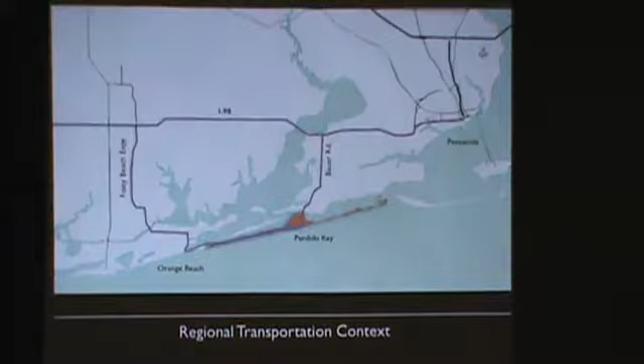Okay, let's talk transportation for a few minutes for a change of pace. We're working closely with the urban design team. These are the folks that get a blank sheet of paper with an engineering scale and measure exactly 60 feet for the commercial depth of a store because they know that works. Some teams just do asterisks and triangles with no scale to what they draw, but these folks know urban design.

So we have a rule of thumb in our planning: LU1 TR2. Figure out the land use pattern and design first, and transportation comes second. Never do your transportation first and then tell the urban designers to see what they can do with that—you've given them one arm behind their back, or even worse.

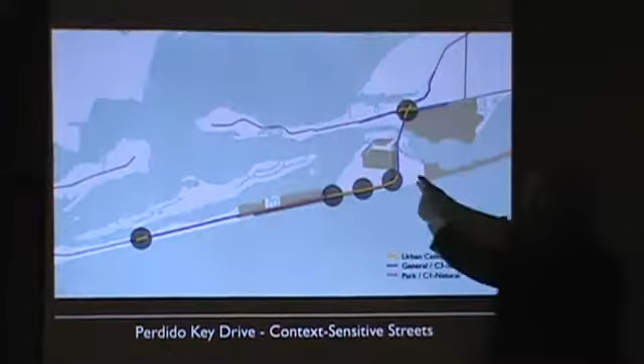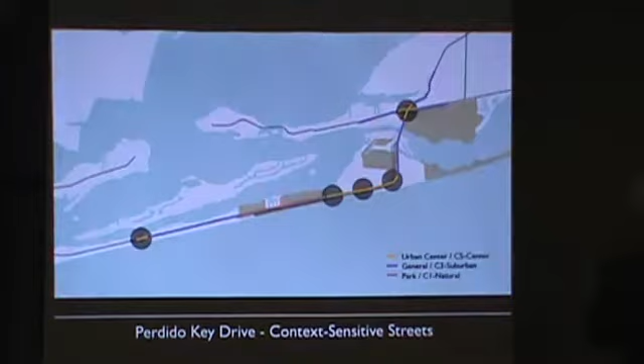So land use pattern and vision for the place first, transportation second. These are a general indication of town centers that can emerge along the area, and we'll have thoroughfares designed differently as they go through different contexts. The thing you want is diversity of cross-section. A lot of DOTs in the country used to be state road departments working out in the countryside, so they liked a cross-section that went for 6 miles without changing, and only changed when they got to a town—but towns were miles apart. We want changes very frequently, every quarter to half a mile, you change the street.

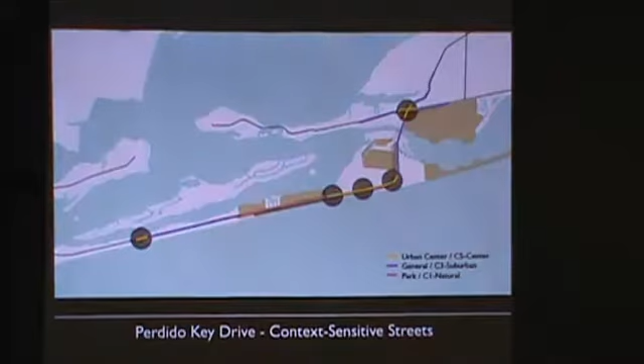Now, one of the first things we wanted to look at is very short term—what could we recommend for this island that's very short term and inexpensive for you to do? You see that little sign up at the top? That's the first thing: 30 miles an hour at the bend where the tall condos are across from the shopping, and it's a fearful walk across that street to get to the other side, unless you're in the prime of your life and confident. If you're very young or very old, that's a difficult crossing. So 30 miles per hour for the posted speed limit from Johnson down to the next place.

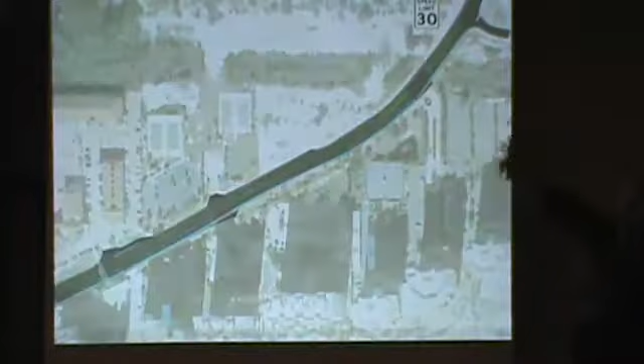Now, back up—this blue line is a sidewalk we're proposing on that one side of the road. And there's a way you can do a curb that separates the traffic from the sidewalk, where the curb goes along, has a little notch, and comes back up.

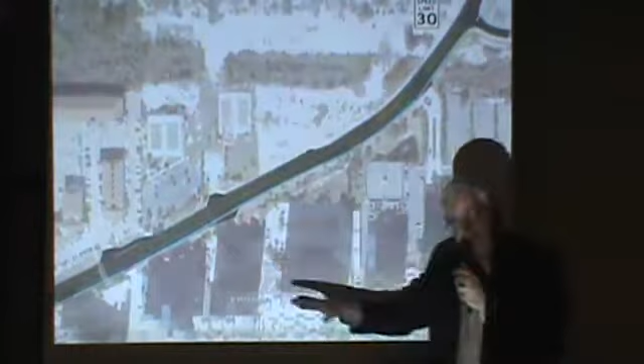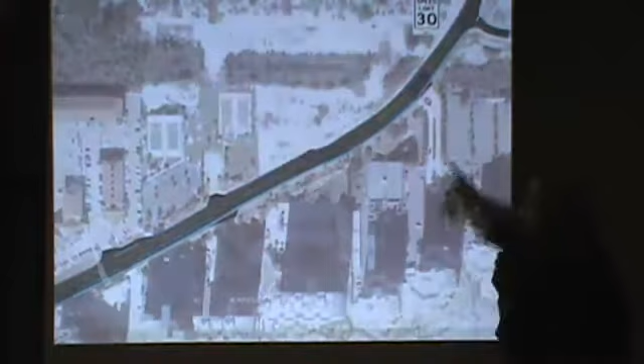The sheet flow of water can go through those notches. But for most of the distance, you have a nice curb that will make pedestrians feel more comfortable. Here's a pedestrian crossing of the driveway, and another pedestrian crossing.

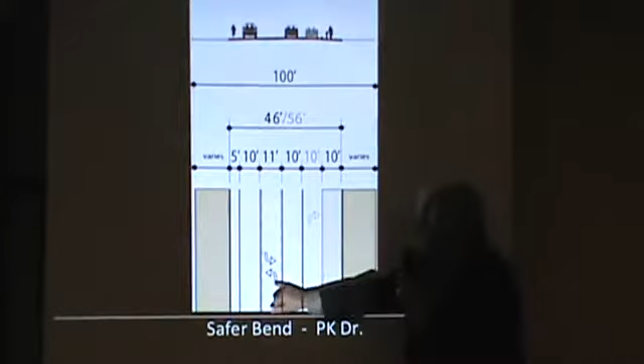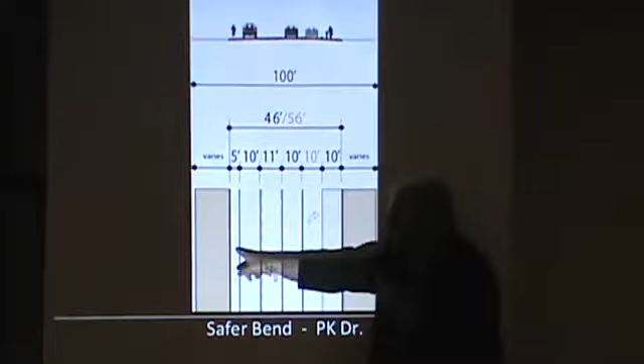Let me show you the next detail. There's a 100-foot right-of-way, so what we're doing is taking the center turn lane and 2 lanes, and putting a pedestrian sidewalk down this side. There's still a bike path on that side, and pedestrians and bicycles can share this. It's not ideal, but it's an interim measure to bring some pedestrian activity to this central area.

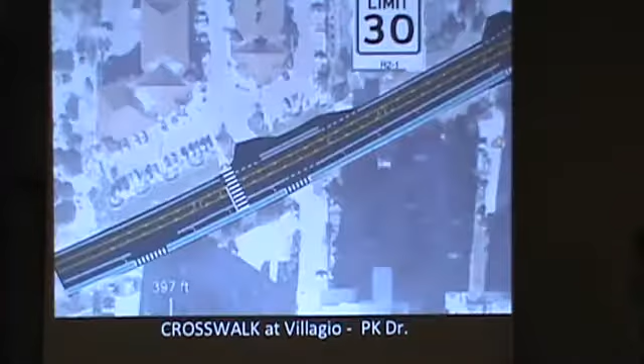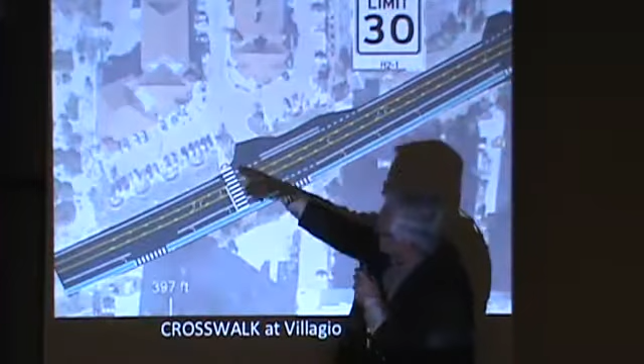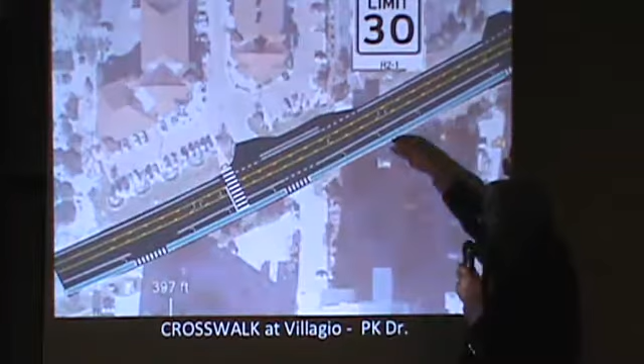Here's a close-up of the Villagio Shopping Center on the other side, 30 miles per hour again. Here's the brand new crosswalk, going from the left side of the entrance driveway, and here's the blue sidewalk all the way on the other side. So you can come from a condo and walk down the sidewalk and have a crossing right there.

You also have a lot of beach access. All along this beautiful Emerald Coast, beach access is very important to the middle class. They're the people that go to the beach access from a modest home further up in the country or city. So we suggest that where you have these beach access points, you actually park parallel.

Beaches on the upper side. You allow parking along Perdido Key Drive there, and you post it down from 35 to 25 for this immediate area. You let people park here, move down a sidewalk to a crosswalk, and go to the beach. That enlivens the area, since there's always a shortage of parking at your beach walks.

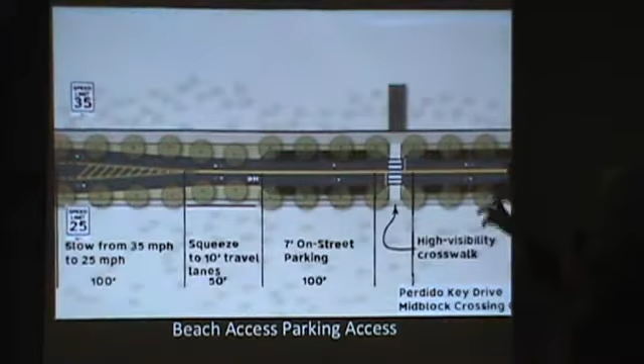One other minor point: each of the beach access points is lacking a dune walkover, a boardwalk to protect the dune. I know you need some vehicle access at some of those points, but you could have a walkover and a drive over—a minor one-lane wooden bridge that motor vehicles could go over to get the emergency access needed at the beaches.

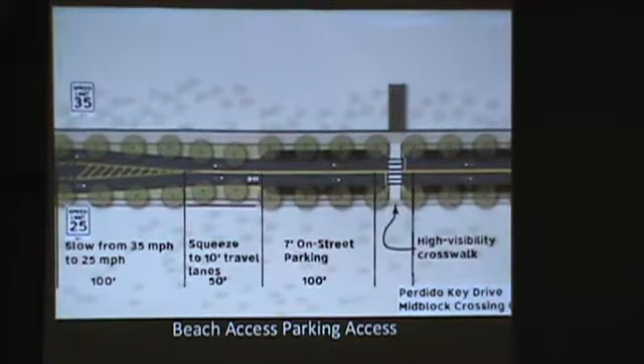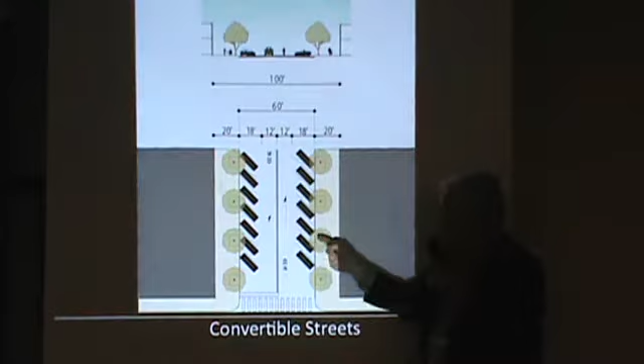This is the safest way to angle park in the world. You park here, go by 2 shops, bring 2 bags of things out, and load it in the trunk from the sidewalk. Then you get back in the car, and the cyclist coming this way is able to make eye contact with the driver—oh, there's a bicyclist, I see. It's not like you're backing in where your head's way back over there near the curb and you can't see anybody; you just hope nobody's behind you while backing out.

So this is the safest way. You also see the car coming, the way you don't with the other method—the other way you go very slowly, hoping to be noticed.

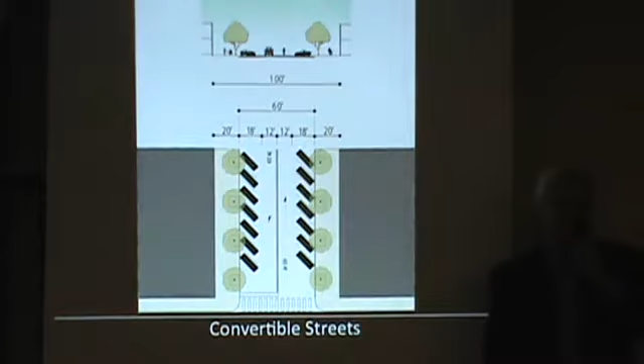How many people have tried this down in the center of Pensacola, downtown? Three, four, five, seven, eight, okay.

One other thing we heard that's good is that the doors actually open in a way that the kids go to the sidewalk instead of through the traffic. Although I don't know any kids that actually don't. But that's a nice thing to add.

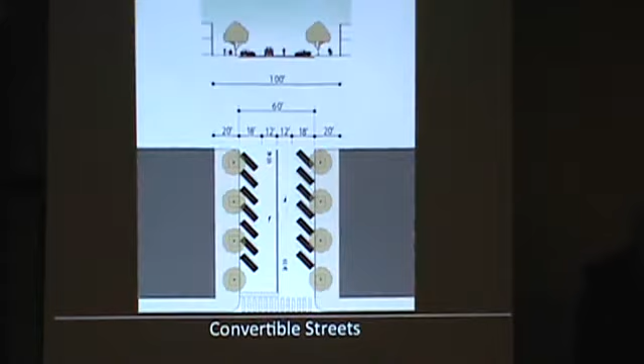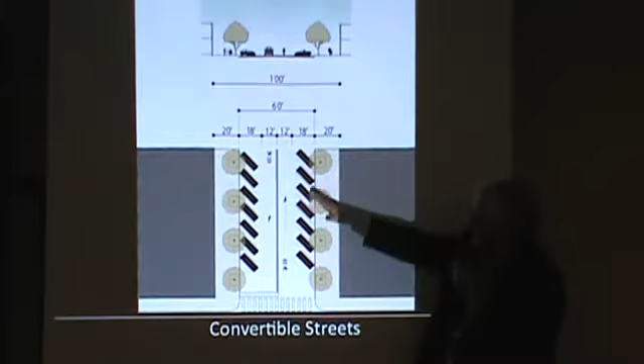The wee ones. Now, we proposed this in South Carolina. They have a lot of racing and football and stuff, and they thought, man, you can back them all in there and have a great tailgate party. That's true, they really loved it there.

Next, please. Now, this would occur. There's a great deal of debate we noticed even before we got here between the 2-lane and 4-lane proposals. So you have the 100 feet of right-of-way, and if the traffic gets to a point where you need to 4-lane this section, here's your 4-lane.

Now would you flip back to the other one, please, and flip back again a couple of times. You get the picture? You just take away the angle parking, go to parallel parking, and it turns a 2-lane street into a 4-lane street. So you can build it right away, but use it only when you need it.

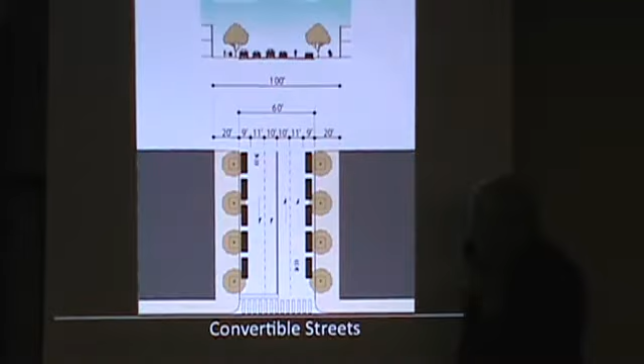By the way, it could also possibly be used on special event days, or perhaps during commuting times, and the rest of the time you can have the additional parking. Cities administer that easily - many cities clear the parking during special times. So we call this a convertible street design.

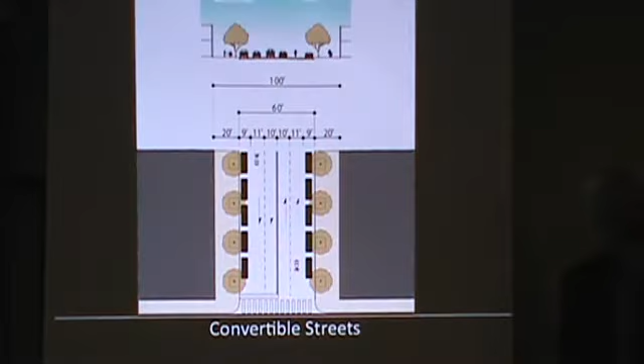Convertible street design. All right, you've heard about the beach mouse from among yourselves, and Andres spoke to it significantly. There is a lot of regulatory activity underway that has to do with the beach mouse. WCI is under a process with Fish and Wildlife and the Corps of Engineers, and they're going to get a Section 7 permit at the end of that. That's been going on for years.

Okay, the habitat plan is underway. Again, Department of Interior has to do that after it goes through Atlanta and up to DC and a couple of places in DC. But that's the one being brought locally - the 66 acres being brought to you. So if you need mitigation, you don't have to go to Washington. This says 66 acres to be administered locally. So that whole process is underway.

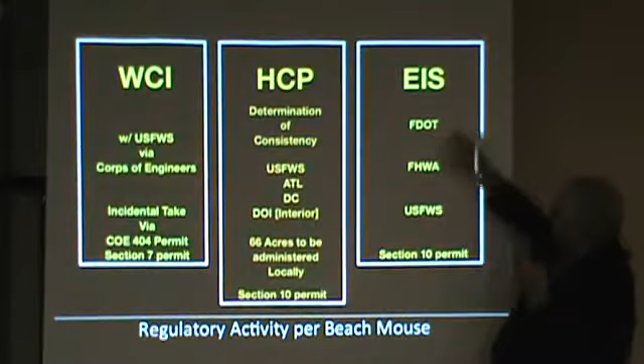There's another process, the EIS, the Environmental Impact Statement, for the 4-lane Perdido Key Drive. That's with Florida DOT and Federal Highway, and again Fish and Wildlife, and that'll be another Section 10 permit - that's a Section 10 permit, for those of you that really like the details. So all of this is going on.

Now there's one thing we want to explain to all of you, because the more you understand, the better - I think we're all adults here. The reason environmentalism is so difficult, takes so long, is that environmental groups - let's say one that wouldn't have me shot, let's say Greenpeace - okay, what they do is they sue.

They sue the Fish and Wildlife and EPA. So whenever there's a mitigation granted to somebody, even as they go through the process, they automatically sue to hold things up, to teach them a lesson. And of course the poor Fish and Wildlife in Washington has its budget reduced by these lawsuits. It's very costly, so they hate it. That's why they hesitate - they try to get everything right.

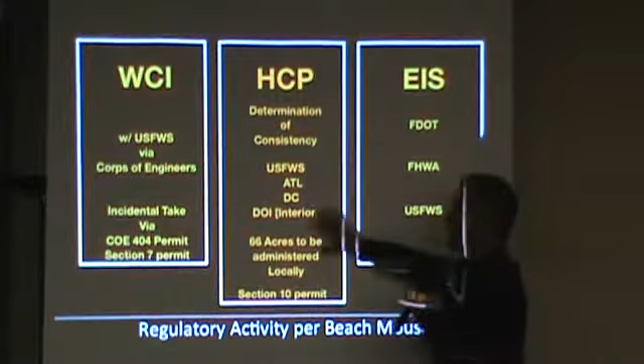This is something we learned here, that this is happening. What we're afraid is that when the road comes in, the widening of the road, and there is a lawsuit - not if, when there's a lawsuit - they'll go ahead in the manner of good lawyers and just sue everybody down the line. Even though this is close to happening after many years, the thing to do is a kind of shotgun approach, and everybody gets sued and everything gets held up. In other words, you're punished.

So one of the things we're recommending, frankly, is to get this master plan done, and just hesitate for a while before you go into this one, so there isn't this kind of waterfall or avalanche of lawsuits that then affects everybody, including WCI. This is just real professional advice from people who tell us this is the way it's happening in Washington. So we're being very careful about what and when we ask for, just to prevent this from happening and getting everybody involved and stuck for another quite a few years.

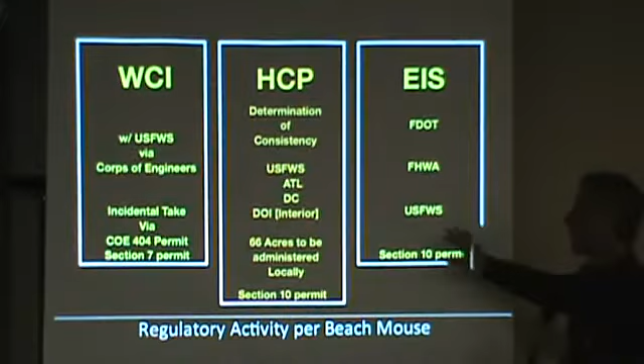So there's a whole underlying strategy here that's not technical. It just has to do - I've never done anything more complicated in my life. It goes all the way to Washington and so forth. But let me put it this way: this is to give you confidence that when we say put it off or do something, we kind of know what we're talking about. It's just to avoid problems.

Minimize problems. I'll tell you a very brief story. By the way, Rick figured this out. He pieced it together and said, oh my God. So this is Rick's sleuthing. Had to get it down on paper.

Brief story. The Florida Department of Transportation, I had the good fortune of working for them for about 10 years, very early, when I just got out of school. Their district office is in Chipley, Florida. And in Panama City, somebody wanted to do something with a street down near the hospital. So they wanted to change something, and that's a difficult thing to do. Well, they got resolutions from about 9 different organizations in town - the Chamber of Commerce, the Garden Club, the Kiwanis Club. All these resolutions were taken, then they drove them to Chipley and put them on the engineer's desk, the chief engineer. And the chief engineer said, well, you've made my job a whole lot easier. And they got exactly what they wanted.

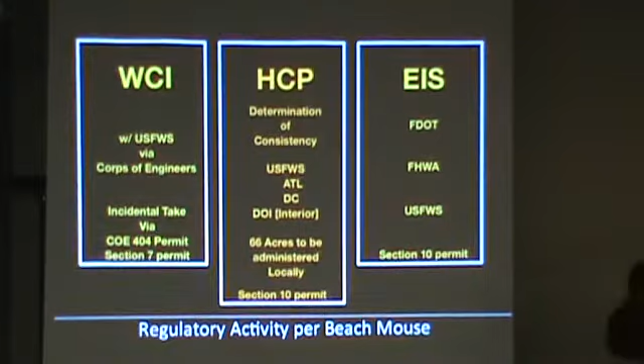The DOT has never been in more of a mood to do what you at the local level want to do, if you get your act together. But it's best if it's unanimous. So if you can get support behind a very good plan, then there may be less encouragement to do any lawsuits. So unanimity - get to where you understand this and speak with each other about it in a unified way. Next, traffic counts.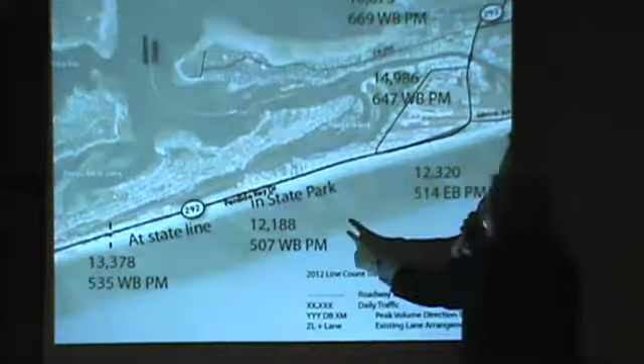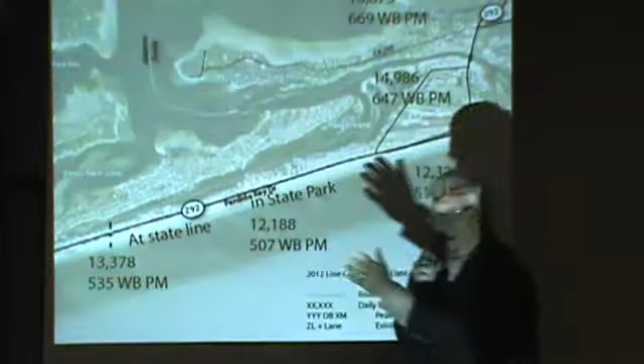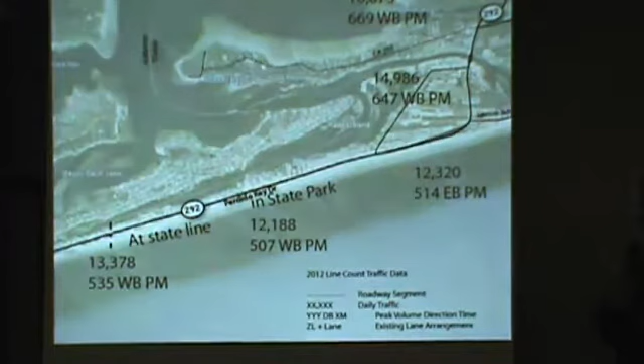In short, you have about 16,000 vehicles up there at the top, right about here. Then you have about 14,000, 12,000 per day - this is vehicles per day. And 12, and then it jumps up to 13. And that's the Alabamians coming across just to get to the Floribama, and then they're going back. So that's why that number is bigger than this number in the middle. So that's the current picture, and that's the very first thing we look at, because that helps us get our finger on the pulse of this body of land.

Is that average or seasonal? That's average. That's a single point that it was measured in May of this last year, May of 2012. So it's just getting into the peak season - not quite June, July, August, but late May.

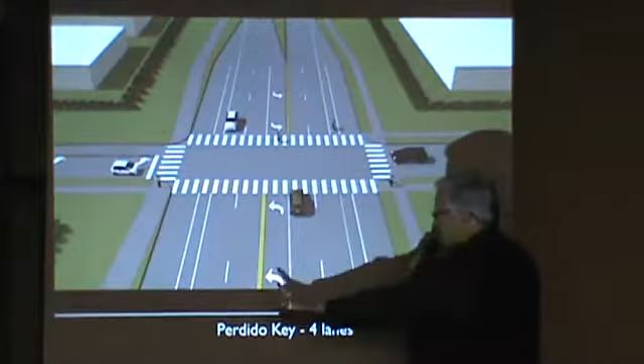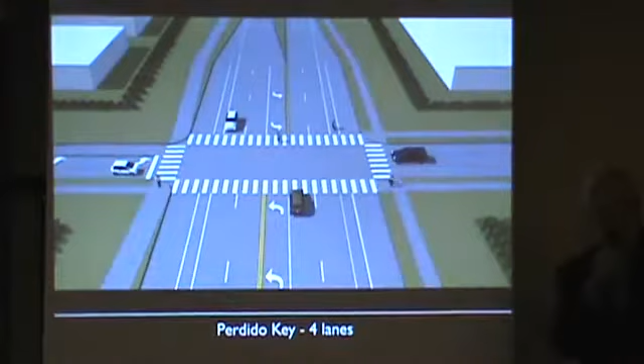This is what's being discussed in some reports that are being done for the DOT and for the county. That's a 4-lane, and when you say 4 lanes, that's 4 through lanes. You have extra - there's a left turn, there is a deceleration, acceleration, sidewalks, bike lane. It can add up to 7 lanes. 4 can add up to 7, because there's a center lane in the middle for turns, and then the decel lanes. So right at the point where you want to cross, you might be crossing 7 lanes. These pedestrians are drawn to scale, because they're having to cross that large road. That makes it difficult to cross for anybody that's not right in the middle of their lifespan.

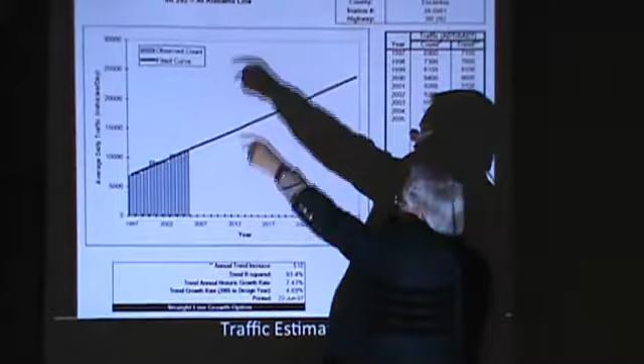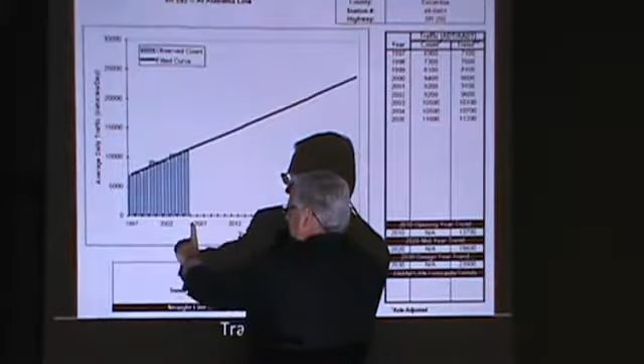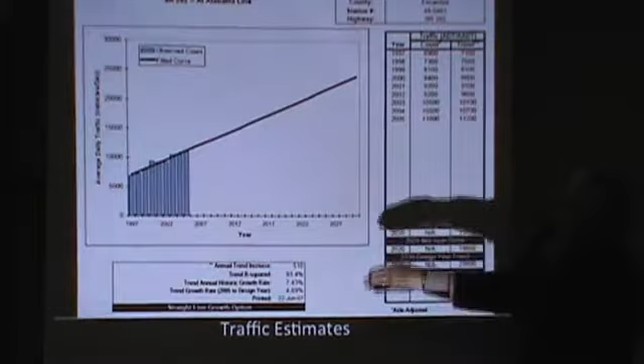Okay, so what do you determine? How do we determine what size the road should be? Well, this is an example right at the Alabama line - you can see that right at the very top. This is a page out of the county report that's been done so far. They looked at a number of traffic counts from '97 up to 2005, and then did some mathematical straight line growth projection at the state line. It goes up to about 25,000 when you get up to 2030. Now, that's one way to do it. Let me look a little closer at this.

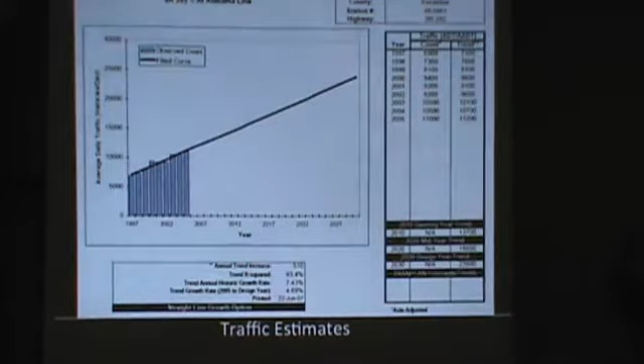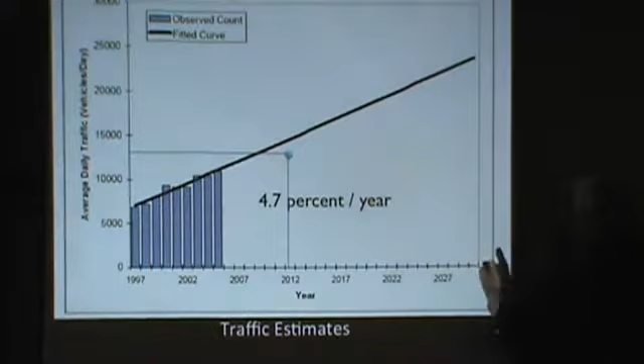That's about 4.7% per year straight up. Now, normally those curves are not straight for that long of an amount of time. This is the 2012 count that I just reported to you, and it's a little below the straight line. So there's a lot more uncertainty once you get out to this end of the whole scale. Now, when we're designing, that's one way to design roads - just count the traffic, factor it up, and design the road. Now, what we spend a lot of time looking at is pedestrian safety.

And pedestrian, bicycles, and bus riders - so this is the pedestrian fatality potential. If you're unfortunate enough as a pedestrian to be hit by a moving car going 20 miles per hour, there's a 5% chance you'll be a fatality. Going 30, it jumps to almost 50% chance you will not survive. And at 40 miles per hour, you don't have a chance.

The posted speed in that curve - at what speed do you not have a chance? 40. And you know what that feels like? Nothing. The posted speed in the curve, accounting for the gravity, is 45.

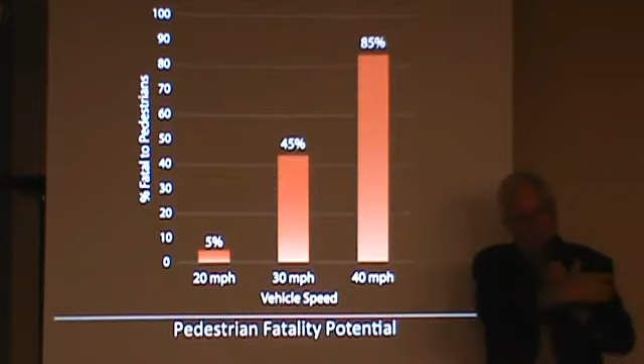Dwayne Carver and I have been measuring with our speed guns, like we told you earlier in the week we would. Today we caught somebody going through there at 57 miles an hour, right in front of the Villaggio. Most of them were at 50 going through there.

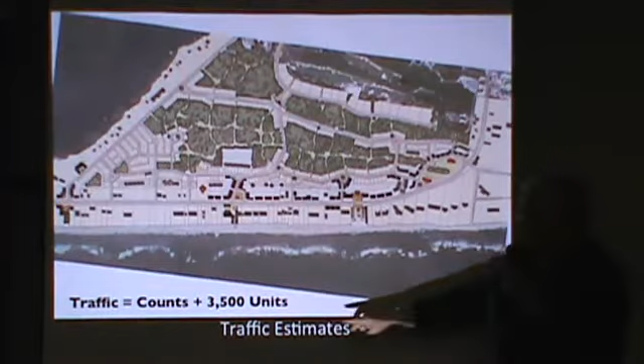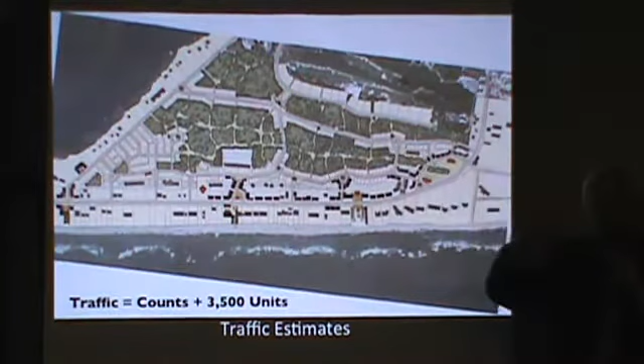Let me show you exactly what we calculated at a certain point in the whole system. This is Gongora Drive. This left turn vehicle is waiting to turn left onto Gongora, right at the foot of the bridge.

Notice something here - that whole road is tilted to one side. That's called super elevation. The extreme of that is when you go to a NASCAR track - they're all on the side. They do that for comfort when you're driving along at 45 miles an hour. So it's okay at this bridge perhaps, but you don't want that same super elevation down at Johnson when you're coming back into the town center. It's like NASCAR going into the town center. Doesn't make sense. So that needs to be changed.

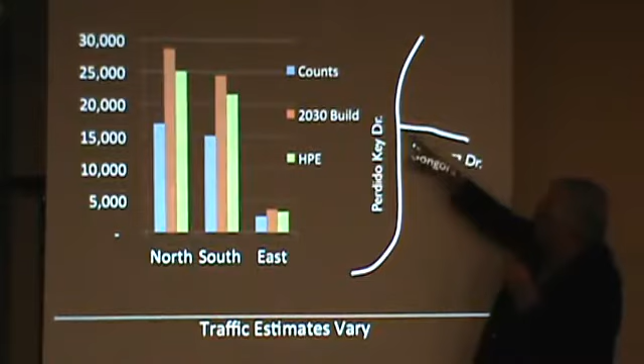At Gongora, we looked at 3 series of counts at this intersection. The blue one is the traffic counts taken last May, at about 16,000-17,000 for the north leg on the top of the T, the south leg, and then the east for the side street.

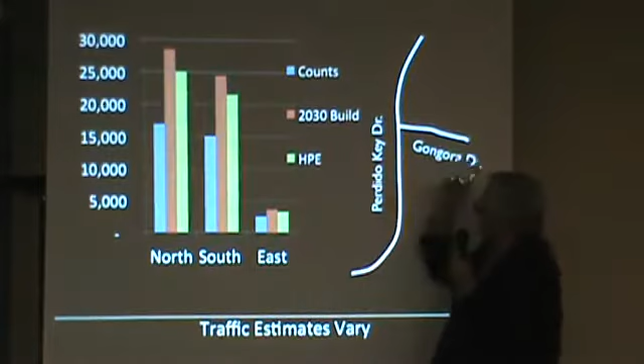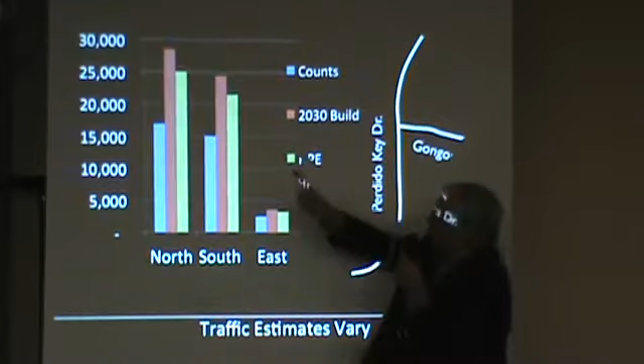Then we looked at the 2030 build traffic in the county's report for 4 lanes, which got up to almost 30,000 at that projection, just below 25,000 for the south leg, and a small number for the east side. Ours, based on the traffic counts plus the 3,500 units being built, came out substantially less - ours is the green bar.

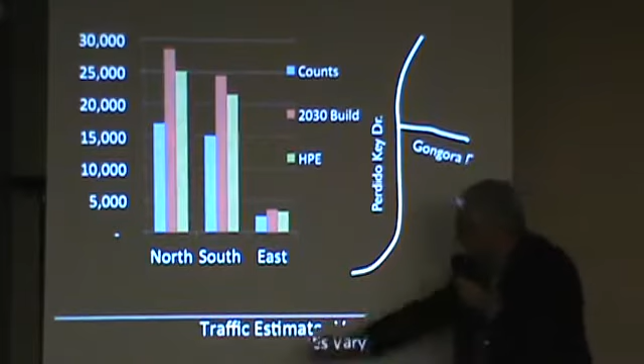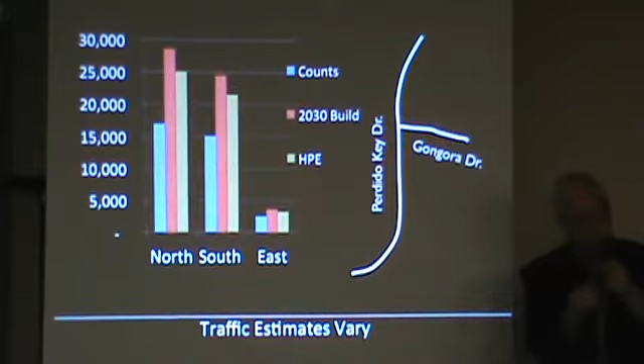So the traffic estimates vary, and the way it will all play out will vary. When there's a high degree of question about the variability of future traffic, which determines how wide the road should be, the best thing we always recommend is to put a permanent recorder measuring device in the middle of the road that measures traffic 365 days per year on every 15-minute increment.

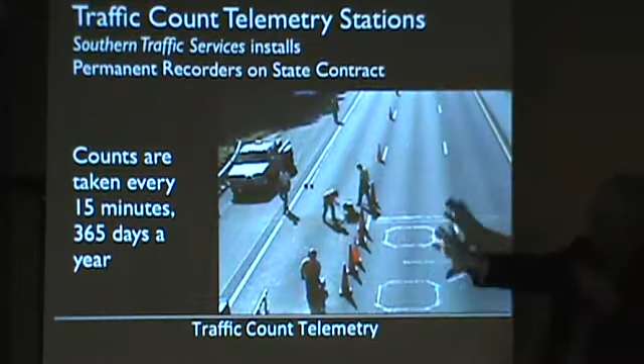But that's a pretty small price compared to the total bridge cost and total construction cost of everything else. All 365 days, they measure every 15 minutes - there's no doubt about what the traffic is, peak season or off season. Somebody mentioned, is that during the peak season? Well, this measures every day of the year. So we pretty strongly recommend that the county work with DOT to get one of these things put at the foot of the bridge on the south side.

By the way, this is just to say the 4-laner still gets built. It's just that what it tells you is at what time the traffic shifts, does the parking shift, and so forth. Because it takes so very long to get anything permitted, designed, and budgeted, that 4-laner simply has to keep moving, because you'll need it eventually. Nobody has said here that we don't need it. The question is when do we actually need to use all 4 lanes, one way or the other? What we hope, frankly, is that it'll be flexible depending on what time of year, what day of the year, and so forth.

It's going to be a really complex... how did you call it? A multi-use 4-laner? You had a convertible 4-laner.

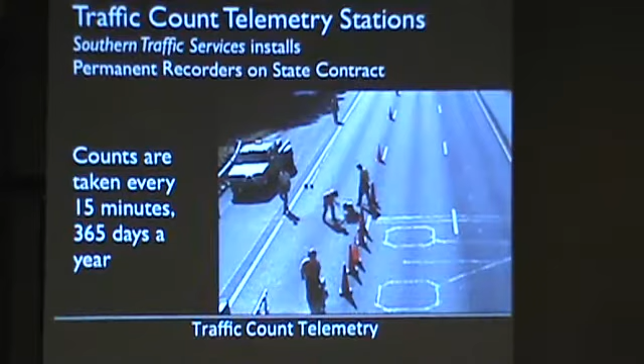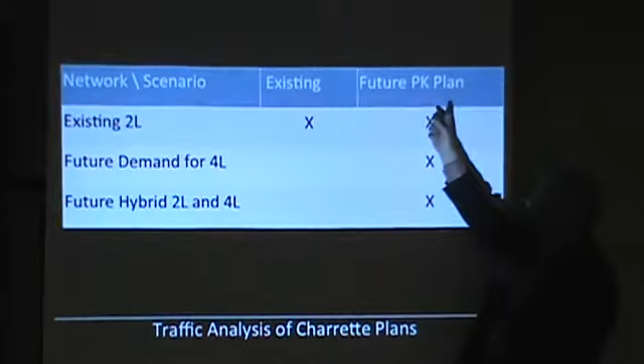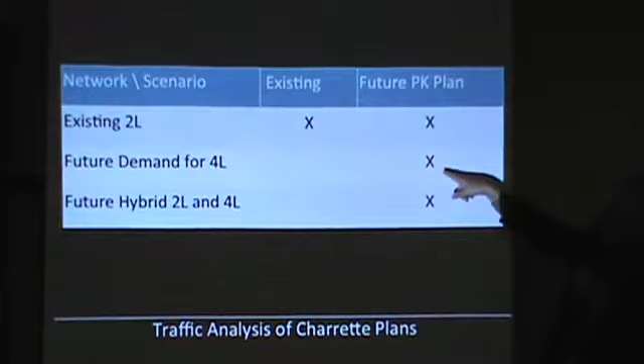So then we took the traffic that we developed and ran a series of traffic engineering analysis models. We took the existing 2-lane on the existing network, then the future traffic that came off of the Perdido Key plan emerging on the tables around us. We ran the existing street system, then the future demand for 4 lanes.

Quick point - I noticed you mentioned the devices would only be on the south side of the bridge. Why not the north side?

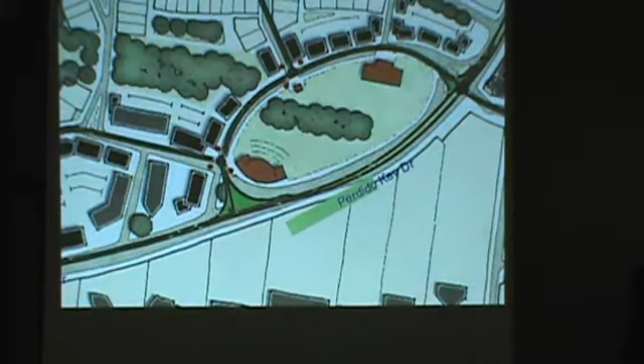Because the congestion at the end of the day is tremendous leaving the beach. We would love to have a permanent recorder at the north side and the south side, in the bend by the park, and just at the state line. But we just can't afford more than one. That's the problem - we can only afford one, so that's the optimal place to put it.

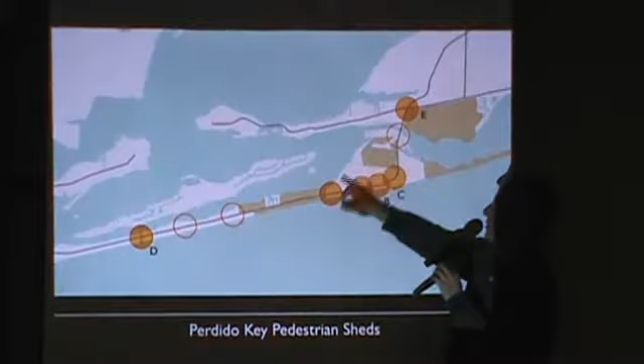Then there's the intersection down here on River Road, which is obvious because here's where it splits. It's actually quite a large ownership - there's quite a large chunk under single ownership here.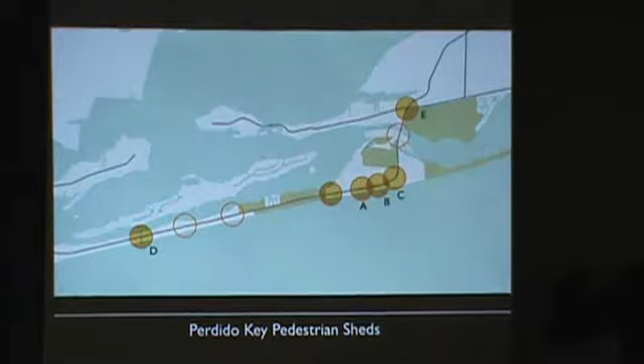There's two others we didn't study because they didn't make that much sense. Then there's the Flora-Bama, which definitely makes sense - there's land there, a lot of people, they're planning to build a hotel, there's already restaurants and so forth, so that's a happening one. The question is whether it's a kind of mess of single buildings with incoherent parking lots or a proper town center. So we're going to show you these.

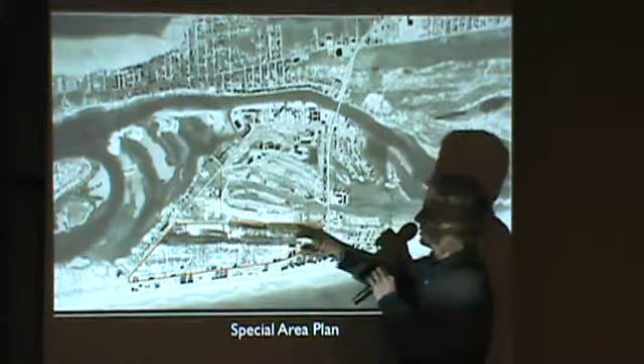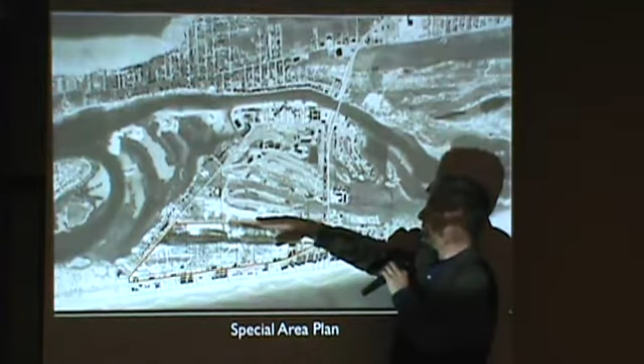These are the ones that we designed, in the dark circles. Now this land here is south of Sims Road. Everything above it is basically designed, allocated, and on the way - that's essentially the golf course. South of Sims Road there is the usual dune, wetland, etc, but basically nothing has been built.

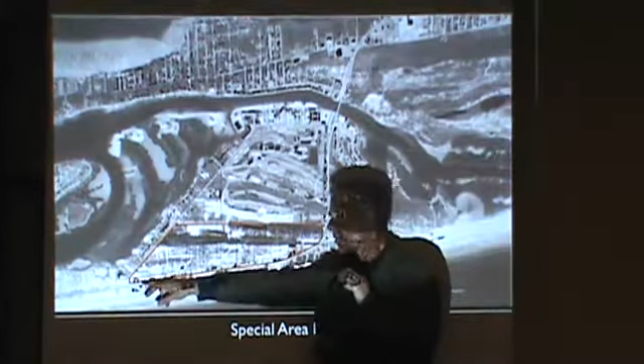Now from the road, you'd think the north of the road has been built because you keep seeing things - well, there's this and that and the pizza joint. But really nothing has been built, and most of it, with the possible exception of the Villaggio, is what I'd call first-generation construction, which you can count on being demolished probably in 20 years and replaced with something of higher value.

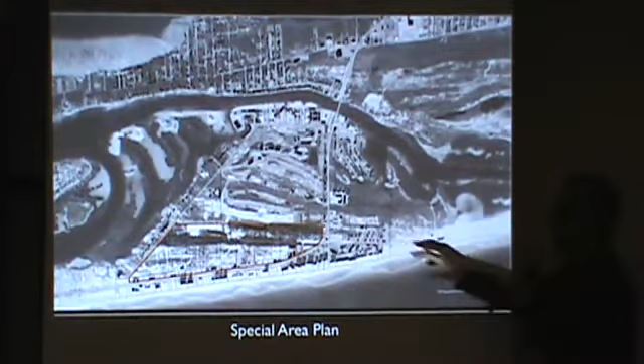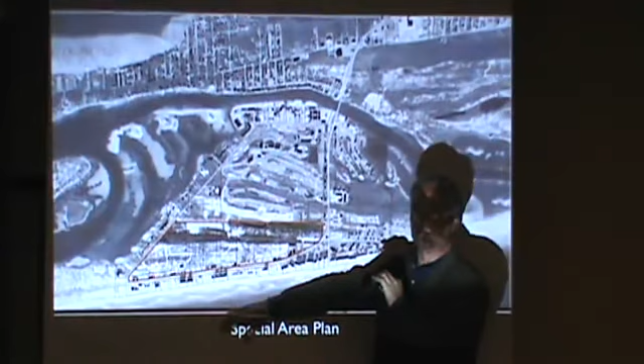So this is a tremendous piece of land that's actually available and very, very close. By the way, this is the kind of land that the seaside pattern makes valuable, because as opposed to the current pattern in which the front is valuable and the back is nothing. Okay, so next - now we took the plans that were...